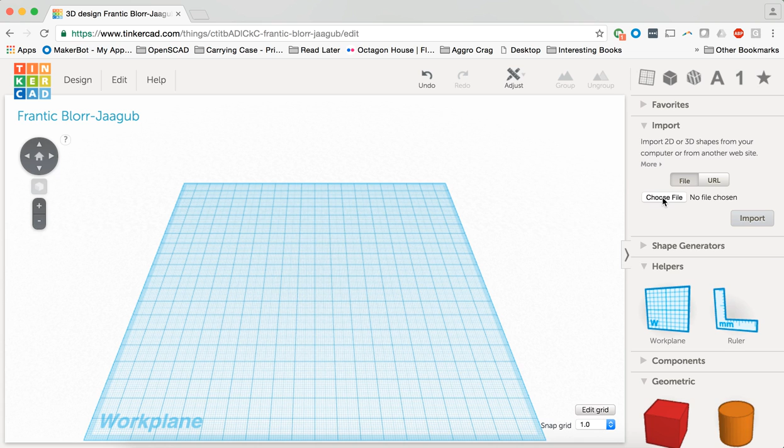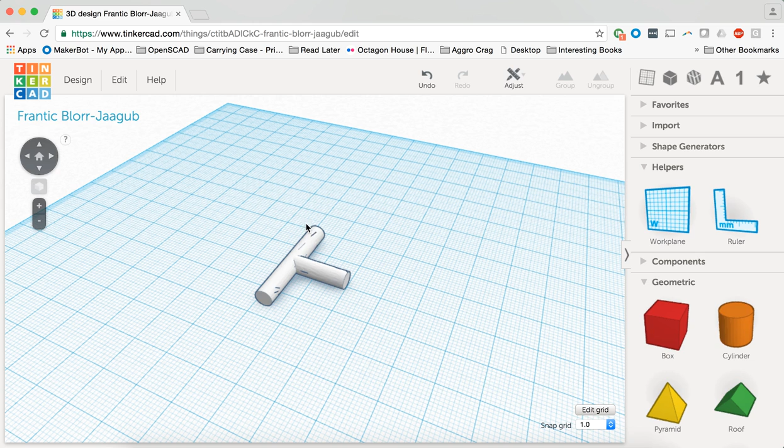So I'm in Tinkercad right now, and I'm going to start by importing one of the pre-made STL files that's included with the lesson. In this case, I'm going to pick the tconnector.stl file and import that onto my work plane. From here, to add any new connection points, I just have to add some cylinders wherever I see fit. I took some measurements beforehand, and I know that each of these connection points has a diameter of 5 millimeters in order to fit on the straw properly.

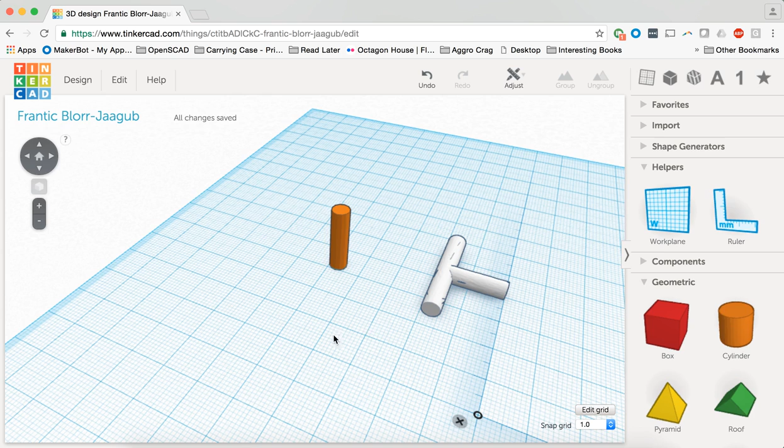So I'm going to drag out a new cylinder here and also drag out a ruler tool, which will allow me to edit the dimension of this cylinder to the proper size. In this case, 5 millimeters by 5 millimeters. And now that it's the right size, all I have to do is get it into the right position. So I'm going to click on my new cylinder. In this case, I'm going to rotate it 90 degrees onto its side, use the hotkey D to drop it down to the work plane, and move it close to where I want it to be.

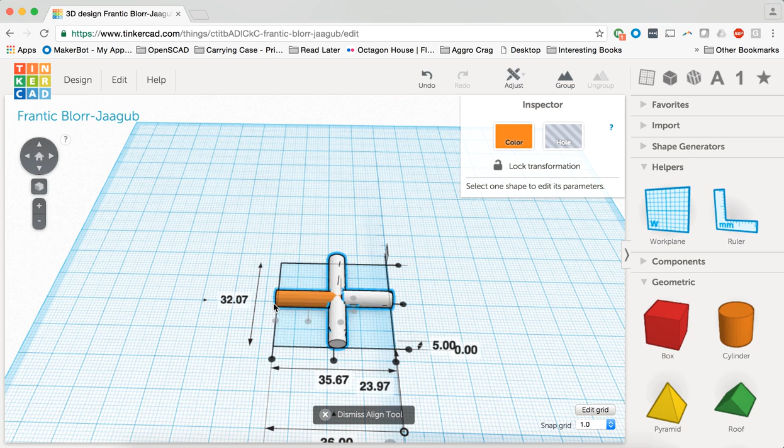And then get it into its final position using the Align tool. So I'm going to select both of these objects, go to Adjust, Align. And in this case, I really want this new cylinder lined up along this line right here. So I'm going to click on the bullet point right here. And now I know they're aligned with each other. And now I have a four-way connection point.

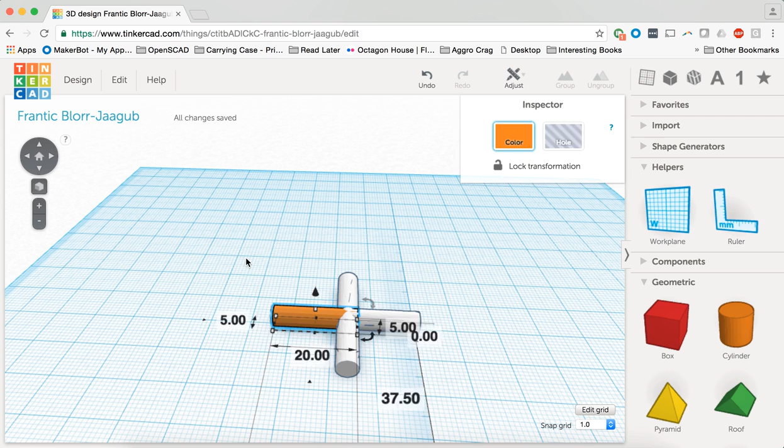And from here, if I want to add any new connection points, all I have to do is duplicate this orange cylinder right here and place it wherever I see fit. So let's go here and edit duplicate. And maybe we'll make one standing up from the center. So I'll rotate this 90 degrees. Again, use D, and since I know it's already in the center, I'm just going to use the arrows on my keyboard to move it over toward the center of the object.

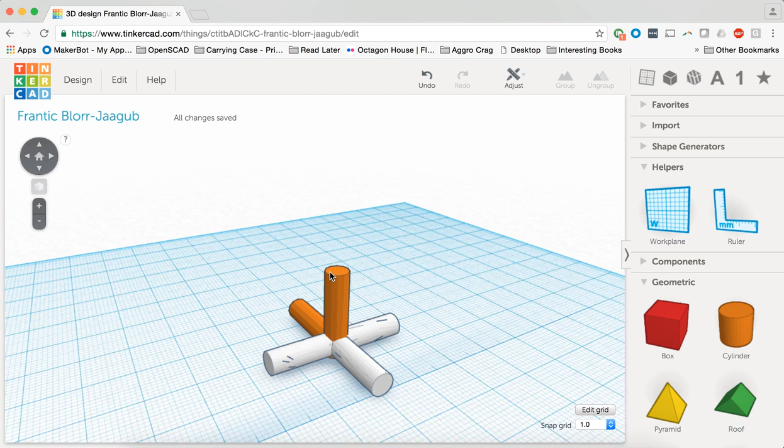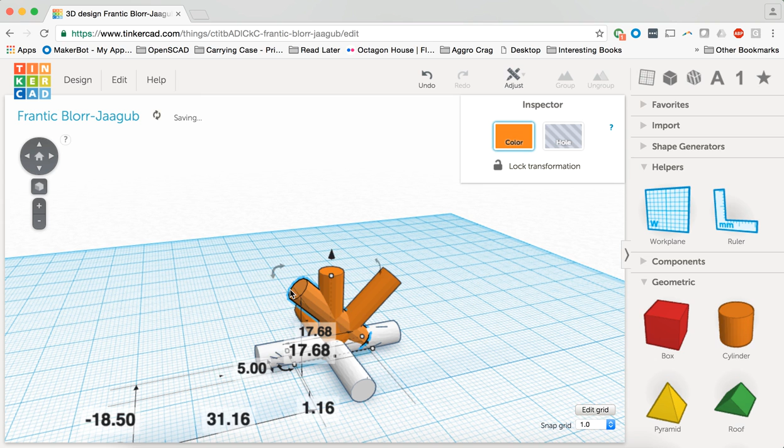And from here, maybe I want to add some 45-degree angle connectors coming off the side. So let's go ahead and duplicate this vertical piece, rotate it to 45 degrees, and again, just scoot it over using the arrows on my keyboard. And do the same thing for our connector sticking out the left side. Edit duplicate, rotate the other way to 45, and use the arrows on my keyboard just to move it on over. So now I have my 4 new connection points.

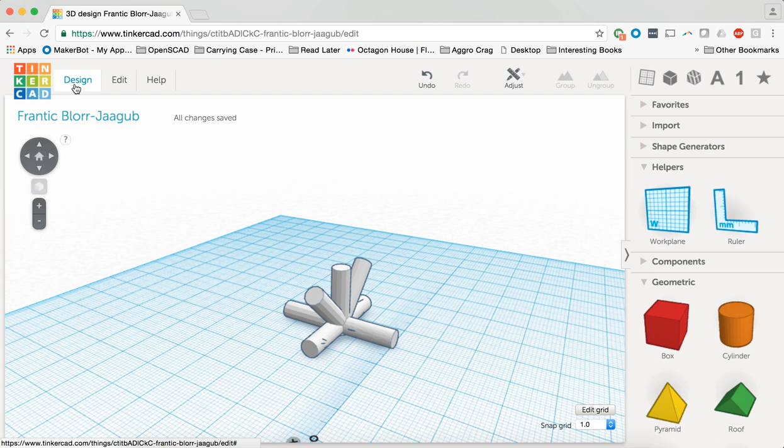The last step would be just to group all these together to turn them into one single solid using the group tool. And then to get this over to my printer, I'm going to go ahead and go Design, Download for 3D Printing, choose the .stl file extension, and from here, I can pull this file into MakerBot Desktop or the slicer of your choice and get it over to my printer.